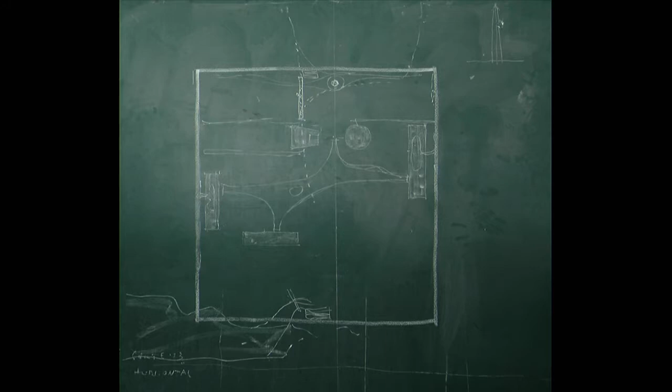The total length of this figure is 3 kilometers. So if I imagine a kind of corridoio Vasariano, for instance, to place some artworks, and if I imagine it as an arcade 10 meters wide, 10 meters high, it would have an area of 30,000 square meters - a little less than the building where we have the Biennale nowadays. That was the way we started to talk about this possibility.

So it's just some collages. The picture of Ibirapuera Park, for instance, this street here, the airport is to that side.

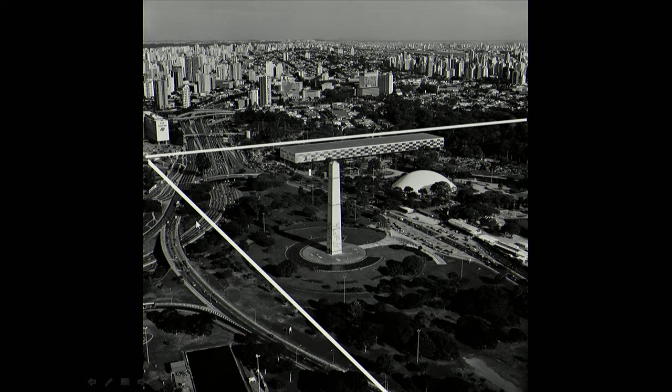Everyone that comes from Rio de Janeiro arrives in the city through this road, so it means 100,000 people every day would cross underneath the museum twice. So we could choose where to display the piece, and I could show all the people driving underneath this piece of the museum a chosen piece of art.

The section we imagined to build this, of course, was not a real project, but I think there is no way to think if not in a real way.

We thought of 4 bars, 750 meters each, but how are we going to build? By building 10 columns in each, so the distance between columns, the span, would be 75 meters, which is a distance very convenient for an egress staircase, the perfect measure to display it. So each one of the columns would have a staircase inside.

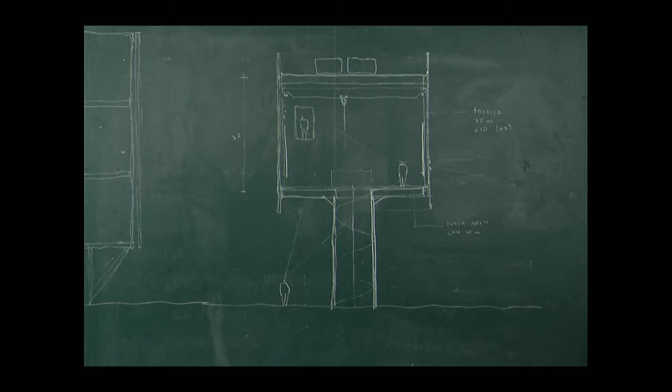The span would be faced by a truss made in steel, in such a way that we had 4 construction sites if I take each one as a bar, or if I take each bar as 10 columns, I could have simultaneously 40 construction sites, because each column could be one. I could make the truss in the whole country and then bring it. So this is a building that could be built very quickly.

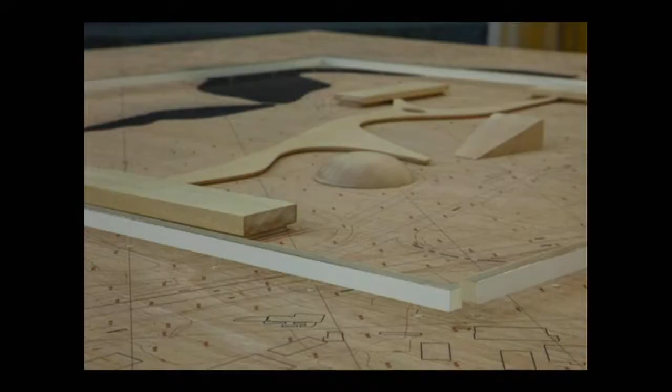And it's nice because when we start to display the columns, the way we chose the span and everything was to make it so that each road, each tree could be preserved in this process. This is the model that we showed at the exhibition.

And some collages as well.

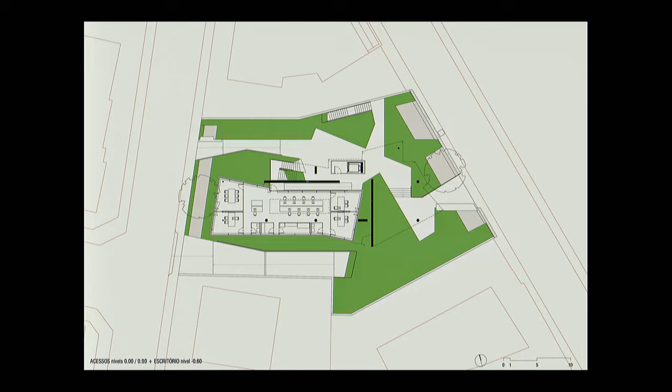One feature of the site was that it had two different streets, so we could cross through. We tried to keep the ground level pretty much as a free level, so that we could cross from one street to the other. This became a very often-used path by the community. In the ground level, shown in this image, we just have one small office, a structural engineer's office that belongs to the same people who invited me to design this project.

This is the plan of one of the apartments. It shows the small apartments where we have one floor divided into two small apartments. And here, the exact same slab, but with one single apartment that has like two cores. On this side we have three rooms, more for the children's space, and then one more bedroom. So it's a house that has its meeting point here in the middle.

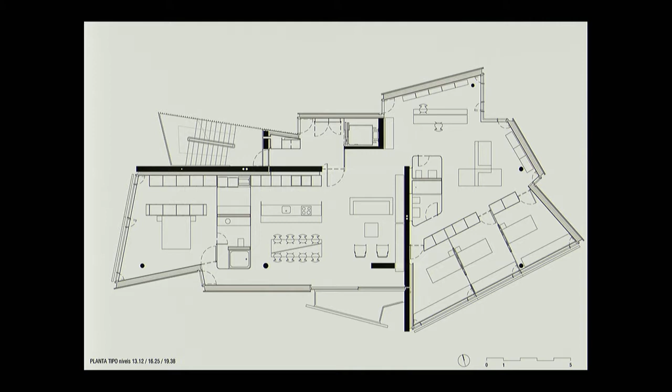One thing I'd like to highlight in this image is that the bathroom is shown by one single line, because we actually built it like that. The bathroom was made by just one panel of glass, so this wall is one centimeter thick. The materials are always minimal. The rooftop is a common garden.

I brought this model just to say it was made by Francisco Triviño, a model maker from Spain, living in São Paulo almost his whole life. To me it's very special because this guy is now 91 years old. He gave us this model, produced like two or three years ago. He's still working—he just finished a model for us last month, and it's unbelievable. I really love to work with him.

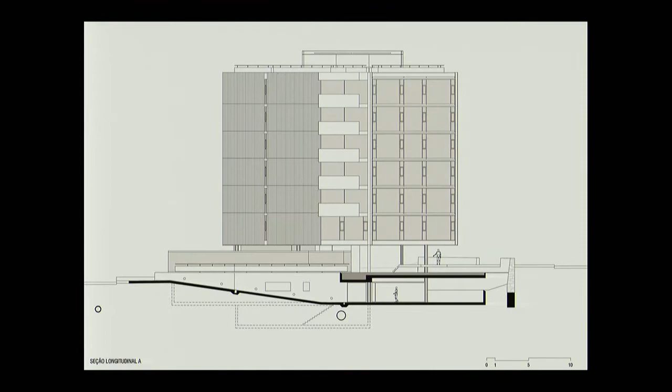He's the same model maker who produced the most attractive models for the Brasília competition, for instance the Rino Levi project. So this is just to mention Francisco Triviño and the building that we did.

Of course, as a Brazilian working in Switzerland, in the beginning I was very worried about all the restrictions, the rules, the laws, all the norms we had to follow to build the building. But we were able to do that. What I'd like to mention is that my peers in Brazil also deal with rules, but it's not so hard compared to all those rules we have to build with in Switzerland. In a way it is harder, but in another way it's much clearer.

It's very funny when I show this project in Brazil—I like to say that here we were able to do everything that we are not allowed to do in Brazil. There are a lot of features in this building not allowed in Brazil. For instance, I could never build a wall this high, like six stories, in wood—this isn't allowed. I could never do the egress staircase outside. I couldn't do the common rooftop as a garden for everyone. It's not allowed in Brazil to have glass from the whole height, floor to ceiling.

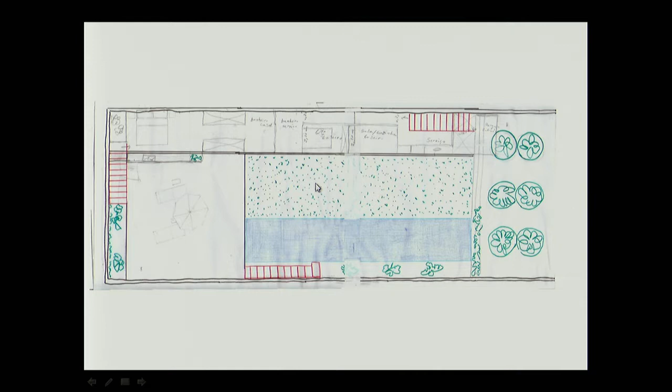So it's really nice to talk to them. And they had a very clear idea about what to build. So it's a swimming pool, to exercise, to swim. Here would be their bedroom, and they thought they would need a place for a housekeeper, and okay, a place to park in the cars, the garden, and that's it.

But they were worried because they used to go to the site and they placed the pool according to their drawing on the ground, and they realized, well, we have no skyscraper, but the maximum height allowed is 6 meters. What means with no setbacks - there is no setbacks required, but you can reach up to 6 meters.

So, and the length of the site is south-north. So you have this neighbor shading the side the whole morning, and if they place the pool at this side, they were worried about the sun, and they change to the other, so the whole afternoon. So, and they brought the drawing, they brought also this question: Angelo, do you know what you think we should displace the pool to each side, this one, that one?

And I said, no, that is - what's the decision to have sun more in the morning or more in the afternoon? But of course, the period of sun they would have at the ground level would be the same. No way to escape. But I said, I think it's a very good idea to displace the pool, but not to one side or other.

Let's displace it up. And they asked, but how much? I said, 6 meters. And they said, why? Because that is the surface - if you are looking to the sunlight, the surface is defined by law, again, 6 meters above the ground level.

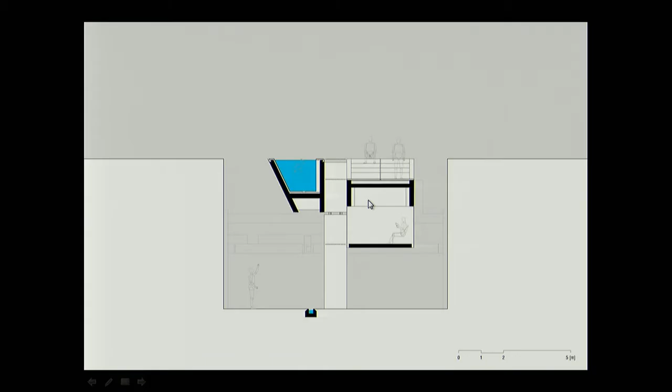And sometimes I like to think that our goal is not just to have ideas. I don't think architecture is first about having crazy ideas or amazing ideas. To me, it's to know how to build stuff. So they had a very clear idea of what they would like to have, but they didn't know exactly how to build it.

And then we made this proposal. So if you look at the plans, this is the ground level. The landscape designer is very happy because he told me he had twice the area of the site to put garden, because the walls, the 6 meter walls, are also gardens. So while in general we have to find the maximum FAR on a site, here we were trying to find the opposite - the maximum area of garden possible.

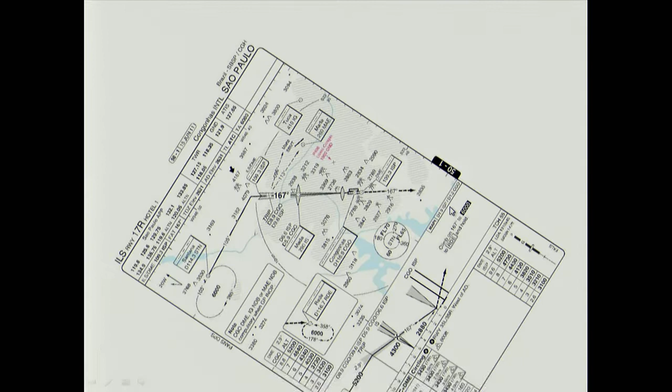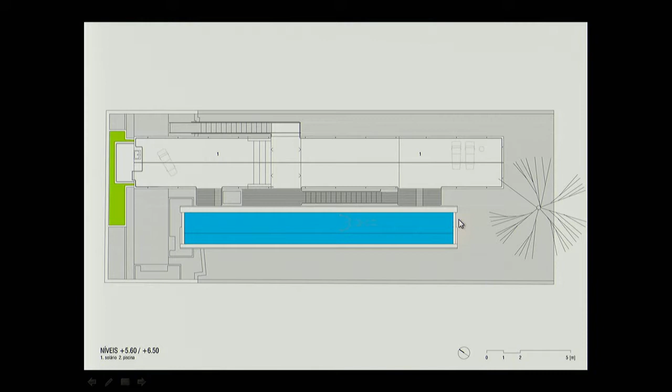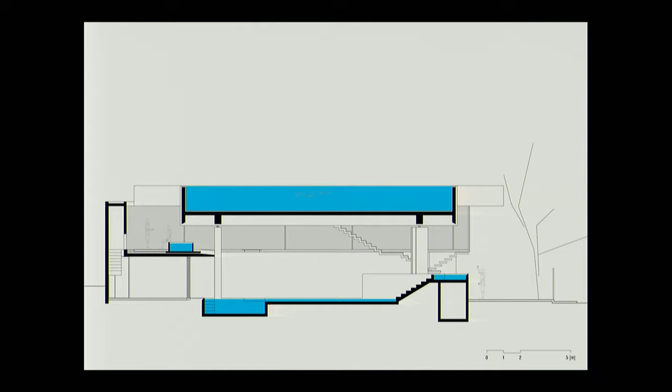When we make it circulate, the water drops fall down this way and that way to the other pools, and the whole system works as one single pool, displaced also vertically, as the garden also works. So it is like this: the water pours at this point and that point, to here and here, through the staircase to this point. And from this place where we have the pumps, it recirculates up.

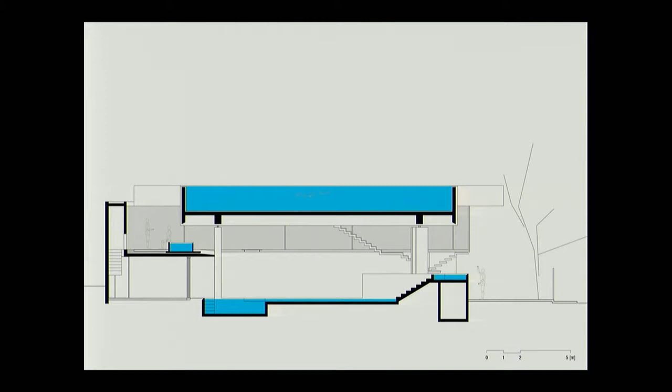So it is a project made by some pieces. It's hard to define what is exactly inside or outside, what one thing starts or finishes. I like to think that it's not so.

One thing that is very nice to me is the fact that each level has a different mood. When you get inside the site at the ground level, you are inside this 10 meter wide, 25 meter long place defined by 6 meter high walls. But when you get to the rooftop where the main pool is placed, your limits change completely.

And so, of course, in Brazil we never heard about thermal bridges. It does not exist in Brazil. And it makes sense to me because as we don't have below zero temperatures, there is no condensation, there is no freezing, and so it changed everything.

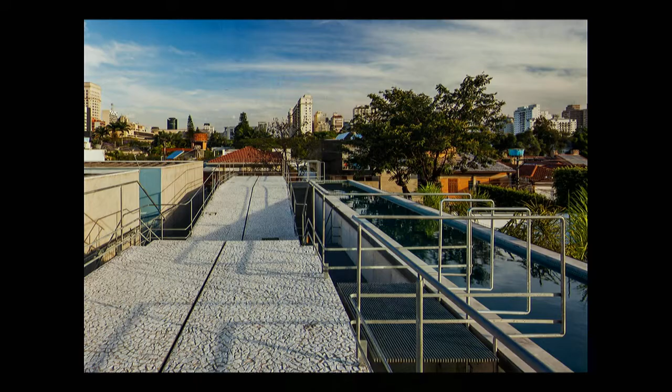And here I hope you can imagine what I said, that when you reach the top level, the place is different. It's a different landscape. The boundaries disappear, those first boundaries disappear, and you can see the skyscrapers and those stuffs.

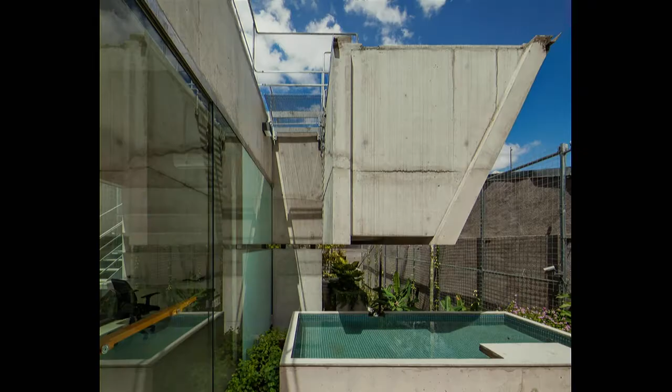The structural engineer we worked with on this project is an amazing person and a very skilled engineer, and we could do a lot of stuff. The swimming pool is counterweighted against the other part, the apartments. Here you can see that we could even totally detach the column and the beam, and that's why we made it this way, to highlight it in the glass, to keep it.

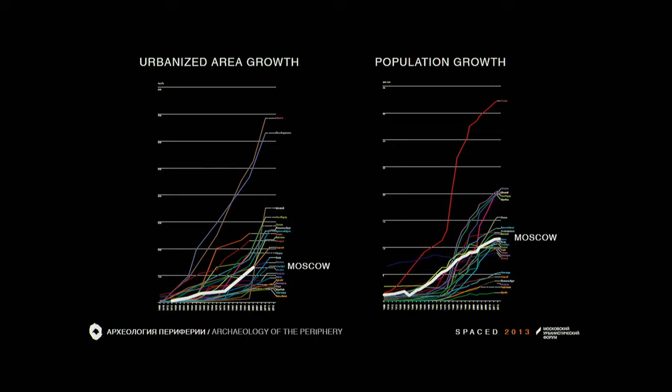Then we did this comparison of Moscow. Of course it's about urbanization, and this area grows during the 20th century, and we can see the population—I'm sorry that everything isn't clearly visible, but if anyone is interested, you can download this from the Moscow Urban Forum site. It's open, not like a property.

Moscow is somewhere between Lagos and Cairo in terms of population growth, but it's still ongoing. The general tendency is that 2 billion people will be living in slums, maybe mostly in the peripheries. Maybe it's time to shift from planned cities to spontaneous cities, because we cannot control these megapolises. The idea was just to understand what's wrong with these peripheries.

All of the values are about streets and pedestrianization, and we now have 10 more pedestrian streets in the center of Moscow. All of the investments counted are like $5 billion a year for this pedestrianization in Moscow.

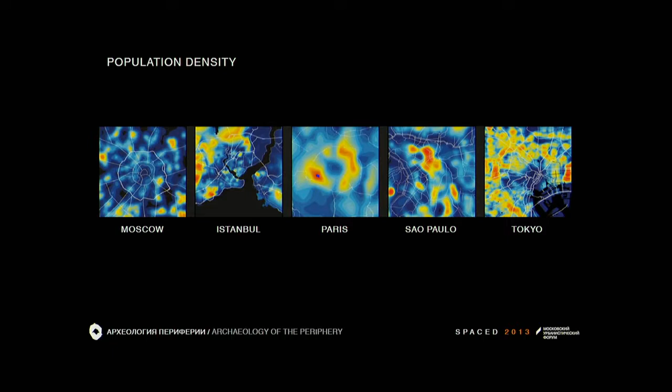Here you can see the difference in these peripheries. And this is interesting - if you compare the population density and public transport accessibility, you can see that only a few cities like Paris are working well. Others are completely not. And if we are talking about Moscow, we did this with MobilityInChain.

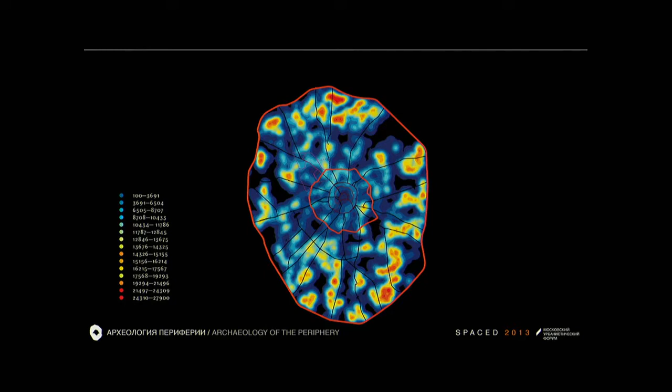My friend Federico Parolotto, who is based here - and honestly I forgot to invite him for this lecture, but I need to mention that it's their job. This is the population density on the outskirts. This is the accessibility of public transport. And this is the result of the program until 2030, improving the public transport.

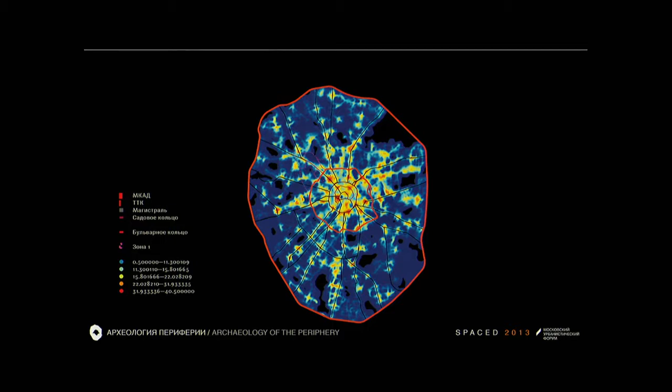And you can see that almost there are no changes for the periphery. There are, of course, but not a lot. And here you can see the difference. And we did a poll, and some of the people inside the MKAD, which is the bigger ring in Moscow, they don't even feel like Muscovites. They feel that they are living somewhere else.

And we have the southeast as the most problematic area. And here you can see - here is the Kremlin and the outskirts of Moscow. And here you can see that donut, the fourth one, the biggest one, which was researched by us, and we named this Old Moscow. There is no river, there is no sea. Moscow is sprawling everywhere - it's like an oil spot.

We did an inventory of all of the waves of construction on that periphery. For Moscow, for some cities, there are sources with that data. For Moscow, it was the first time we did this, and you can see that most of the periphery was built in the 70s and also the 90s, which was a surprise for me.

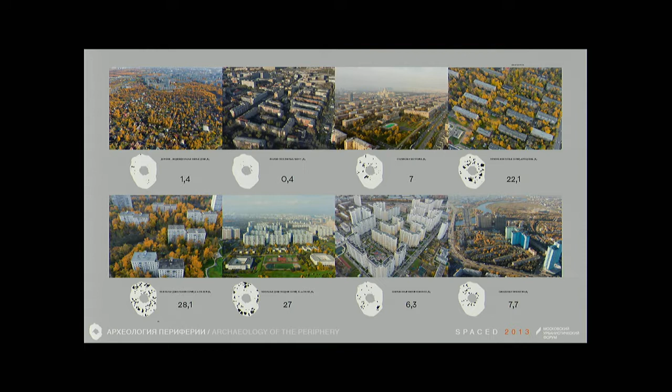And it was clear that for them it wasn't just work as an engineer - it was really new aesthetics. These equal comfortable houses were the idea of urban planning and construction. Equality was the main idea of that era, and it's still there. You can see that - also accessibility.

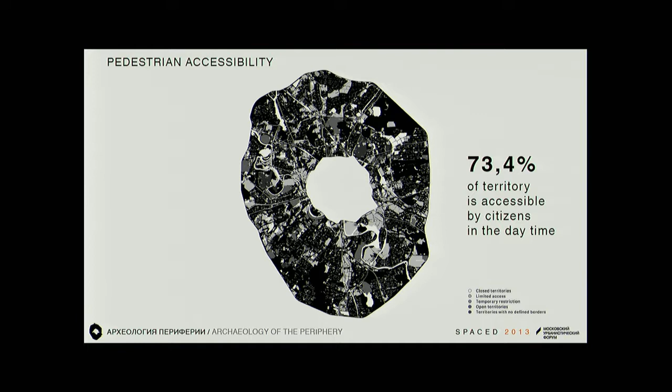We did this research with students, and they checked all of the accessible territories. We have different levels of accessibility - the darkest is most accessible. And we can say that in the daytime, 73% of the territory is accessible. It's like a park already.

Also, we find old features from urban planning existing in the city, and this is also a resource for highlighting that. Sometimes you can see old parks or old roads in the microrayons. Also, we find spontaneous centers.

It was quite complicated technology, and then we understood that new centers emerge in the periphery. This research is about services, and we find that the southeast of Moscow, this spot as an example, is as dense as the center, but nobody knows why - because it's like a flat surface.

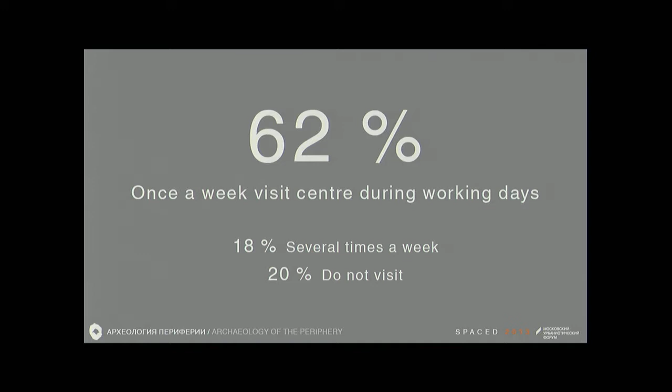Also, we find that nobody is visiting the center - 20% never visit the center at all in Moscow. It was also interesting data. Also, they did this research on data and then understood that 40% transit through the center, but before they thought it was more than 40.

It's only 40 - this also was surprising. Finally we decided not to do any project, because it was only 4 months of work. We decided to introduce the concept of super park, where the idea is to leave everything as it is, not to touch this, because the idea is now to change microrayons into quartals. Nobody can do this in years, of course, and we need to find a new strategy for that.

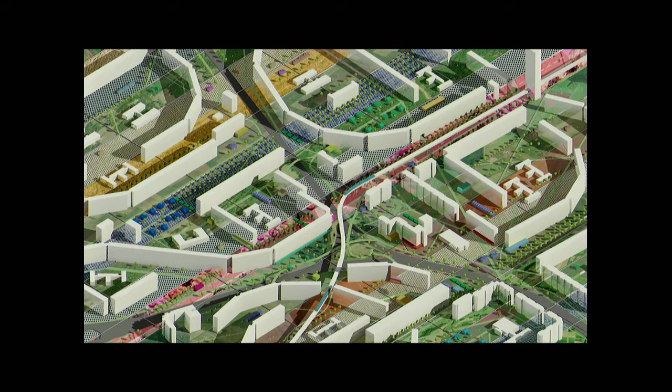And this is an example, like public transport. Maybe it's evident, but not so well understood in Russia now, that you can leave buildings as they are, and maybe work only with society, only with landscape, improving the existing landscape. And finally, we did 2 books, in Russian and in English.

They are quite thick, and also it was a challenge for us. Also, we did a big exhibition, and this propaganda works very well, I would say - right propaganda helps you sell your ideas to the city. You can see that research - you can download this if you're interested, and you can find articles about your cities there.

The second example is another diploma work, 2003. We introduced the Green River concept for Moscow.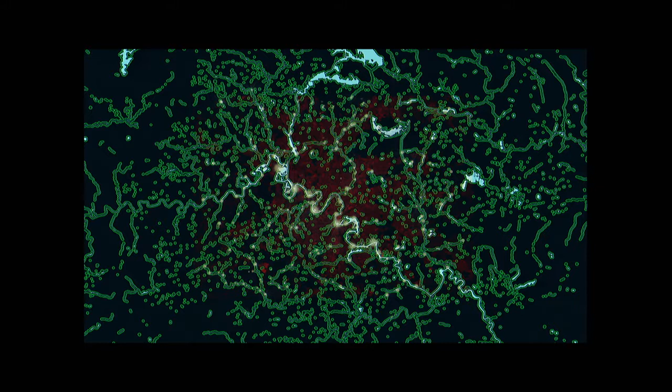And here you can see the scope in Moscow, because the river is huge, of course, and you cannot do this even in 50 years, I think, in 30 years. So it was important to find really important points of intervention, and here they are.

And what is a port for us? Port is exactly the place where city meets the river. It's the public space, of course. And we changed this for the Moscow landscape to make it clear for Moscow authorities.

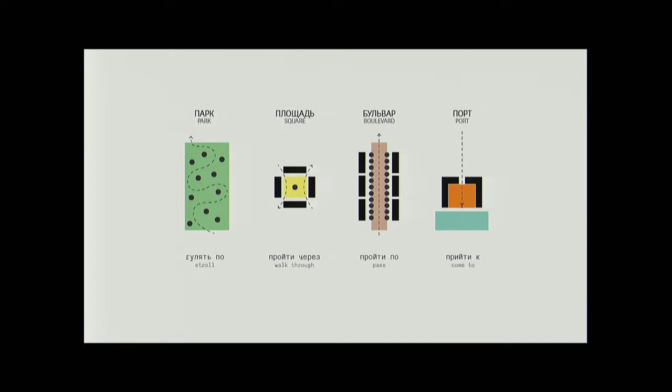Sorry that some of those things are in Russian, they are doubled. Usually it is the park, or maybe sometimes the connection is the boulevard. And finally, port is the destination on the river.

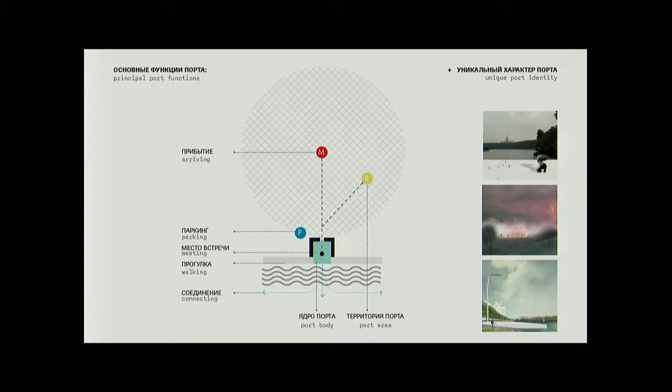Here is a quite complicated scheme. What is the port? It is walking, connecting, parking, and arriving.

We are developing this after the winning competition, together with the city, and we have such places in Moscow where city meets the river. It's the Strelka Terrace, the Strelka bar, one of the nicest places in Moscow. Of course, it is in the center, but for the periphery, we have no such points.

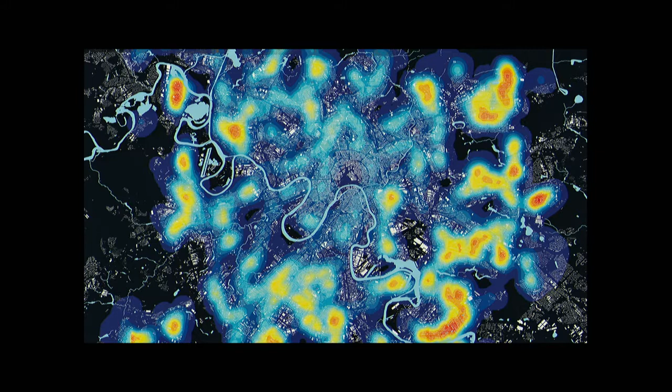Also, we did another study for accessibility, and it's clear that Moscow River is completely non-accessible. It's even unseen in the city. You never can get there.

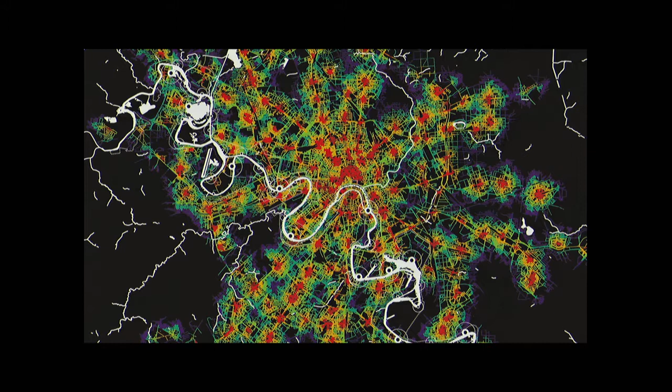With Systematica, we did studies of public transport and bicycle access. This is the new scheme. And finally, the result of this is the concept: we have 11 city-scale ports, 28 district-scale ports for microrayons, and numerous small decks along the river.

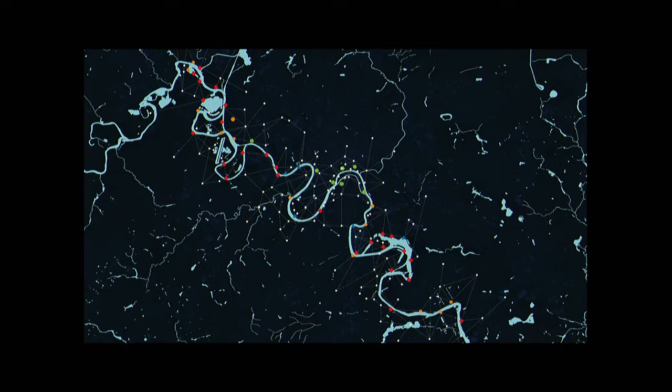This is the scheme of areas adjacent to that, and this is what we are doing now. Each of the ports has a different structure made from the same components.

Pictures, and what's also important to say is that we divided the center and periphery, introducing two structures. First is greening the center, and the second, activating the periphery.

Activating the periphery is about ports. Greening the center has no ports, only green islands in the granite channel.

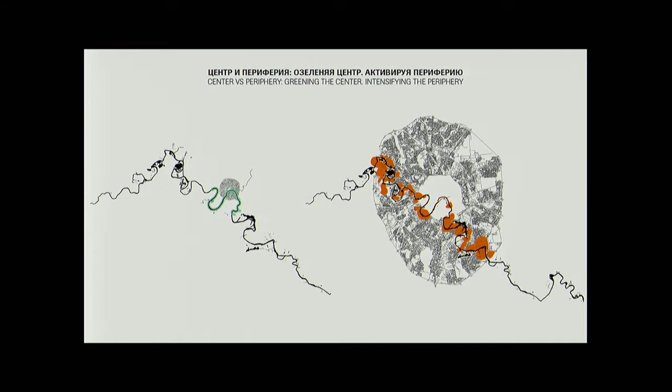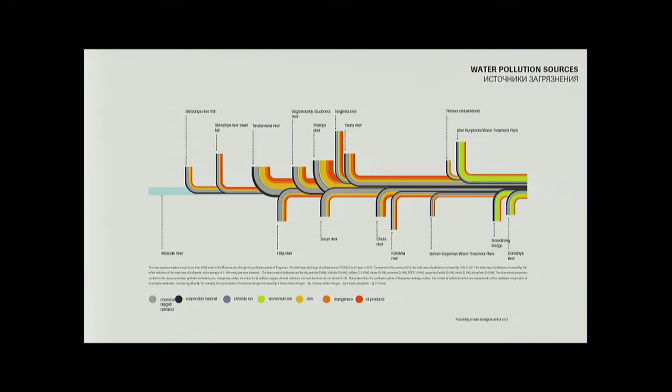Here is the scheme for the river. Also, it's important to mention that we found 120 sources of water pollution, and we introduced this to the city. This is a super important part, because the idea was to make the river clean, accessible, and active. First was clean, because the river is unclean there, and this was the essential part.

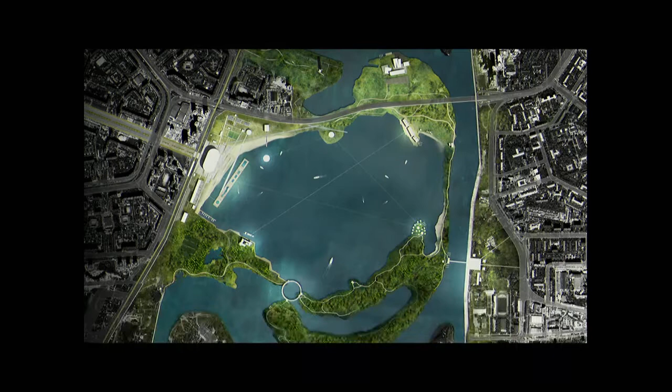Here are the major ports. The first is the Silver Lake. This is a protected area, and there are not a lot of interventions here.

The second is Parliament Gardens, because they decided to move the parliament from the center to this peninsula. Here you can see the place for the new parliament complex. We decided that it will be sort of a new center, and a huge public space is needed on the river.

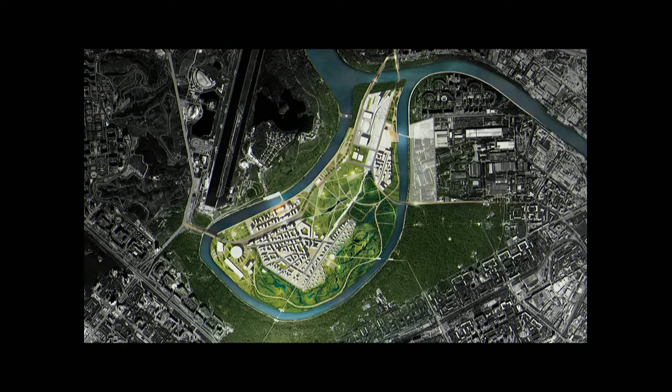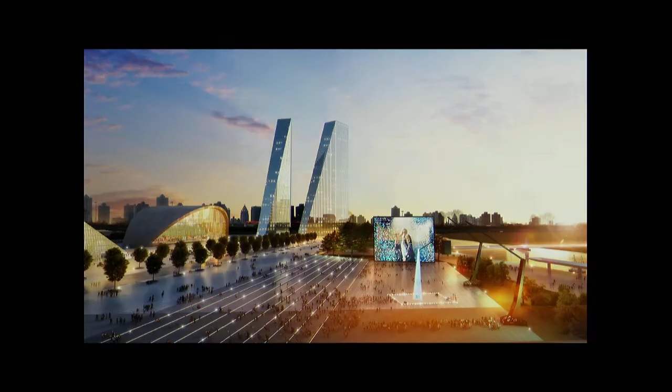The master plan. We did a sketch for the parliament also, which is funny, but we want to make it transparent, because the existing concept is to make a castle from white marble. If you've been in Moscow, you can see such Soviet-style castles. We decided at least to make it something different.

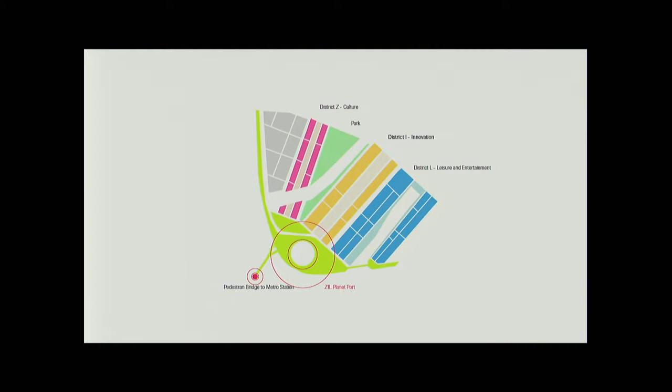Moscow city is lacking parking, and the idea was to do underground parking and cover this with orange and green public space, because it's a really gray thing. ZIL Planet is what we are doing now, with 3 channels: culture, innovation, and leisure.

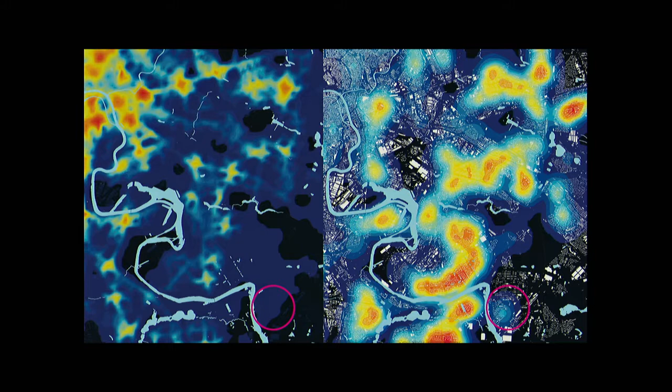And this is what's on. And finally, the most abandoned place in Moscow. You can see that it's completely non-accessible. You cannot get there. There is an oil factory there, and the worst ecology and the cheapest flats there.

Anyway, it's very close to one of the new spontaneous centers. We decided to make there also public space, and the city is now working on that project, because it's a sort of equality also to deliver something to the poorest area.

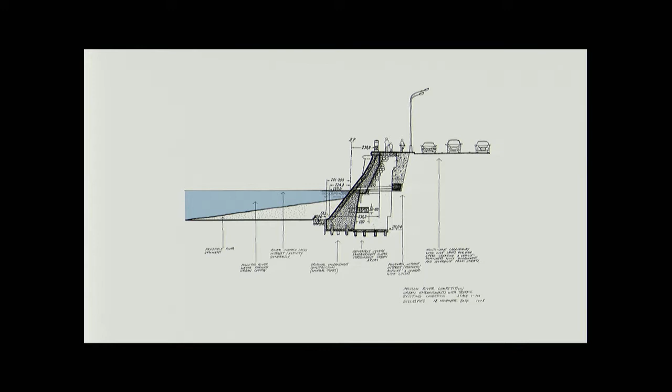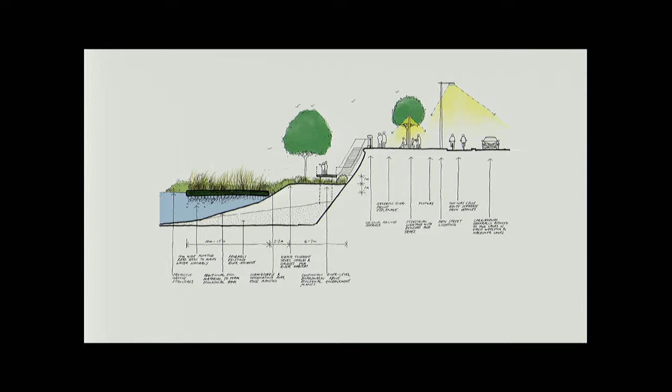The last thing I want to show you is about greening the channel. It's quite simple - it's architecture from green. It's the idea of our partner Brian Evans from Gillespies. This is how it works. It's simple, and these islands are floating and cleaning the water in the channel everywhere.

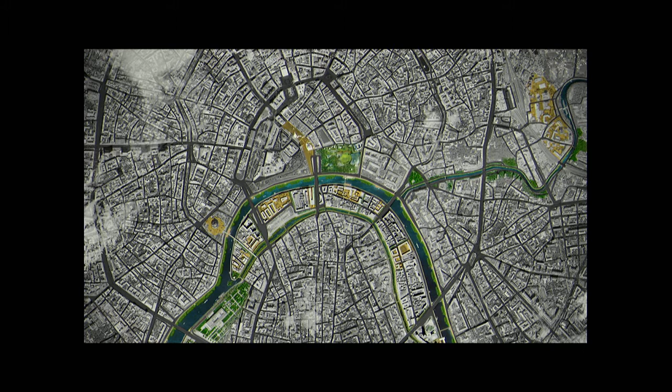Kremlin developments. This is the center. Of course, we want to connect these islands with Zaryadye Park and create this pedestrian route, and maybe do the wetland from the channel, because we also have a channel in Moscow.

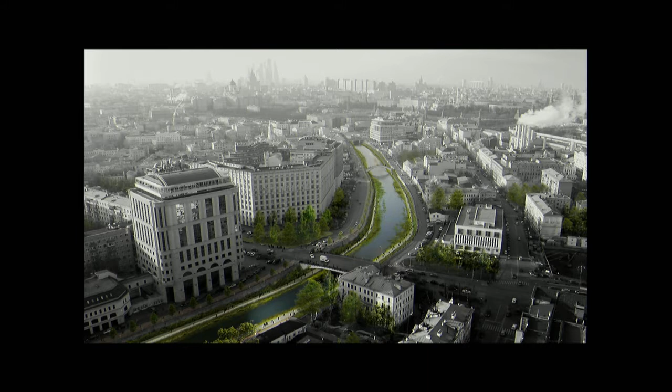It's this one. It's not abandoned, but it's not for ships, and it's possible to do the public space in the channel.

This is like a sort of dream of what the river is, because it's not about using the river as a source for development or for selling expensive flats, views, or whatever. It's not about exploitation, it's about the river itself. That's why we think that these islands in front of the Kremlin, and also wildlife and fish in the water, is the future of Moscow.

It's maybe a little bit utopian - it looks utopian - but now everybody is discussing these islands. I think that this discussion is also productive. Thank you very much.